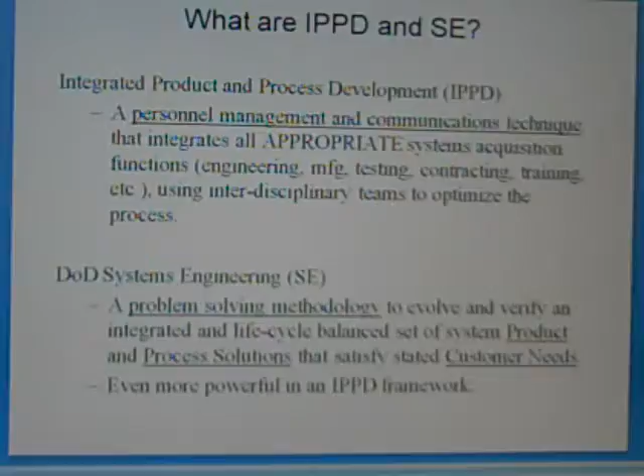Now, without that process, things could be broken, and so in the IPPD, we're asking for everyone's opinion as a participant to prevent those things from becoming problems, to surface issues and things like that before they become problems. So that's why you're seeing here an illustration of the participants who can provide information in their respective areas to help resolve issues from becoming real problems.

There you see cost, manufacturing, quality, logistics, a couple areas under logistics, reliability, maintainability, and I'll cover them later on in Chapter 9. Environmental and safety, human systems integration, interoperability, open systems, and then software engineering. So everything collectively comes together under the systems engineering process. I'll try to show most of these illustrations in the subsequent slides. There are some that are not defined.

For example, interoperability has different characteristics. You have physical interoperability where one, let's say, metal component meets another metal component, and you want to make sure they're operating together as they're supposed to. There's electrical interoperability where one electrical component interfaces with another electrical component, and you don't want to have the wrong voltage or something like that. So it's a way of making sure that one component or subsystem meeting another component or subsystem are operating correctly.

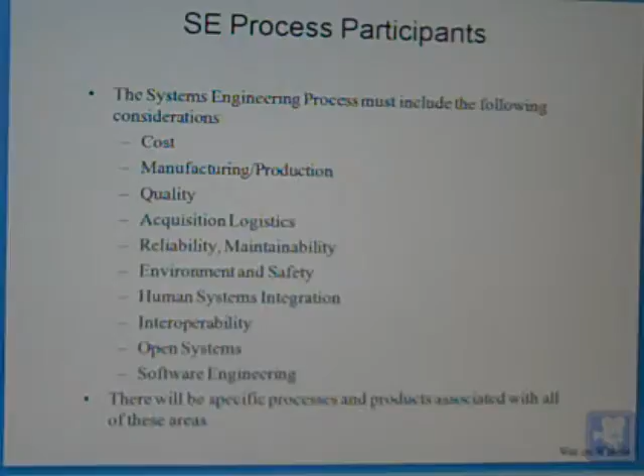Here you see it says systems engineering is a top-down approach to functional decomposition. That word decomposition means basically the job of the systems engineer is to break down a hypothetical system into manageable parts and pieces. So if you look at the diagram in the center, you see that's what's happening. We're going from a system level, down to the subsystem level, down to the component level, to the nut and bolt level, and I like to say down to the goo level.

So we're trying to, initially, early on in the life cycle, conceivably think through the problem. For example, suppose the Marine Corps has a requirement for a new troop transport. Now, normally when you think of troop transport, you think of rolling stock. But conceptually, when it's determined that a deficiency exists as a material solution, someone proposes that problem be taken care of. And on the Army side and on the Marine Corps side, it's historically been called combat developments.

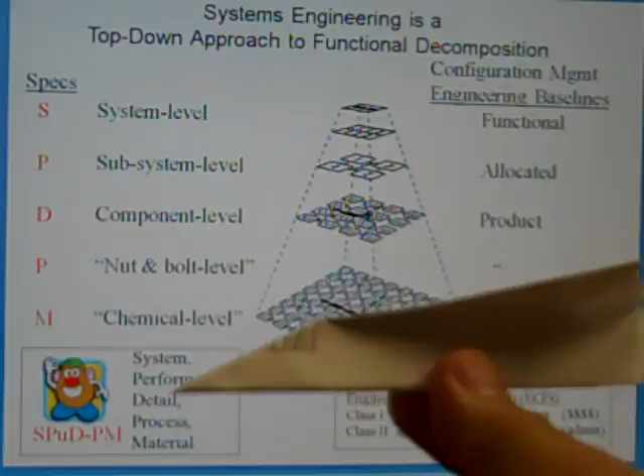So you have combat developers who write the early documentation. They write the ICD and CDD and AOA and all that kind of stuff. And theoretically in that process, they're supposed to define the customer's requirement. They're not supposed to jump to a system level. So you're not supposed to say, we have a problem and therefore we're going to choose an airplane. No, you're supposed to say what the problem is,

and then in the concept phase, try to define what type of technology the customer would need in order to get the appropriate system. And in the transport case, sometimes it may be a new truck. Sometimes it may be a new helicopter. Sometimes it may be a new airplane. But the point is, we go through the process of defining what the customer wants. Now, once we know what the customer wants,

and in our case, let's say the customer does need an aircraft. At the system level, it would be talking about the system's overall capability to fly, to move, to hold people, and so forth. From there, you break the system down. On an airplane, you've got the end item itself, the frame, the engine, and all the other components. So you break those subsystems down into manageable parts and pieces.

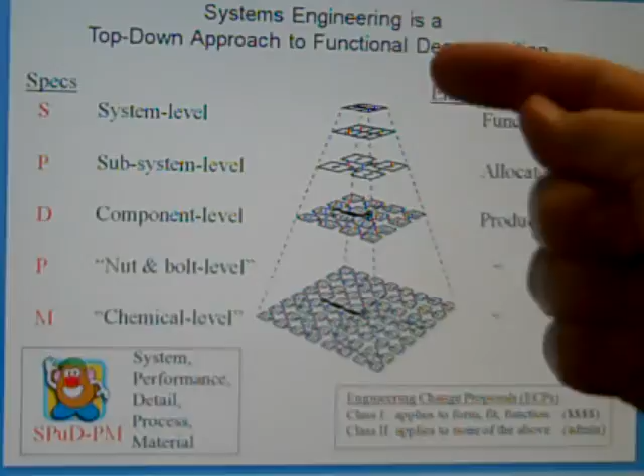And just like the structure's showing here, it literally goes down to the nut and bolt level and down to the chemical composition. Now, we can't do that right away at the onset of our program. It takes time to get to that level. So this picture here is a snapshot over time. And on the left-hand side where you see the specifications, I have my little SPUD PM. Years ago, it was just an easy way to remember these different specifications: system level, performance level, detail, process, and material.

And in essence, that's what the SPUD PM does. It captures all the information as a contractor is developing our system to the point where the system is fully developed and the customer gets it and they're happy. Systems engineering captures all this information in a large computer database, a repository, because once the system is fielded to the customer, there probably are going to be changes that will occur.

So we would go back into this database to see where the problem lies and then make fixes to certain areas, because this effort helps identify a major portion of what you'll see later is called the Technical Data Package, or TDP. So we have a large effort just to put all this together on the part of the contractor, and over here you have what are called baselines.

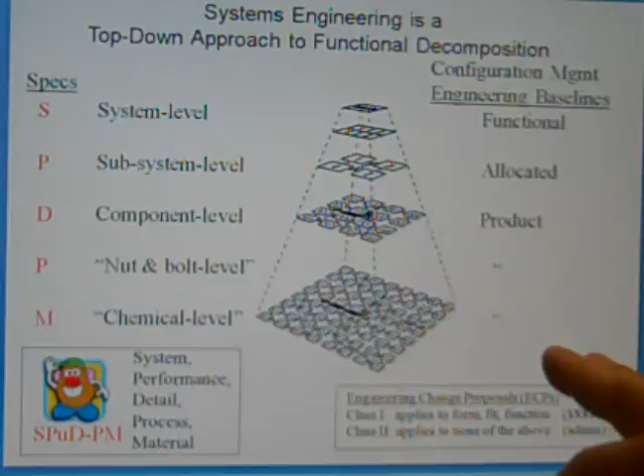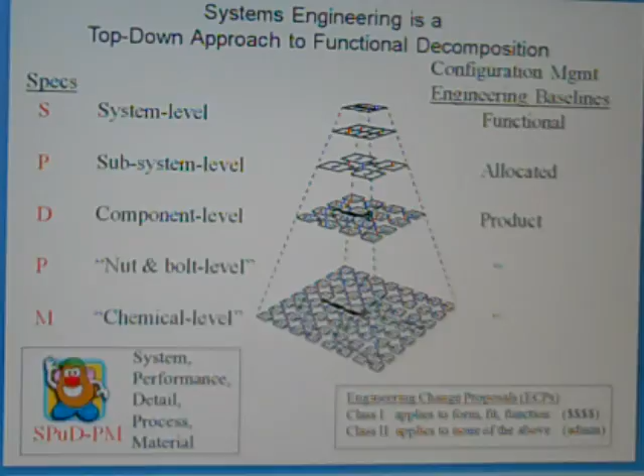These are not management baselines like cost, these are engineering baselines, and they're called the functional, allocated, and product baselines. And we have specific reviews and audits to look at these baselines. So the government will get together with the contractor and they'll start with the first one here. They'll go through the functional baseline, the allocated, the product, and so forth. Not every system is going to be developed necessarily this way. It all depends, but the larger systems pretty much use this process.